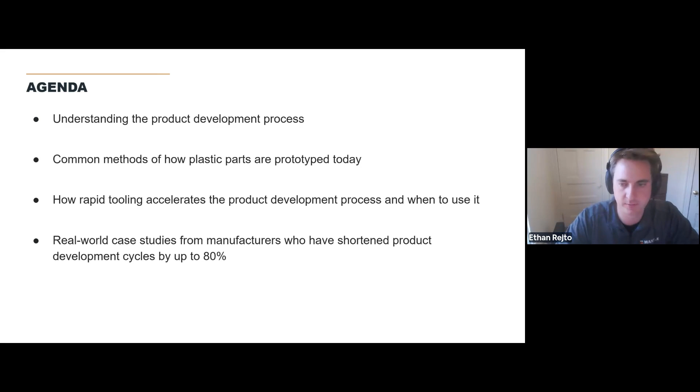Then I have a bunch of examples. I have some parts here on my desk that we'll talk about, of people who are actually doing this and how they're using rapid tooling to dramatically accelerate their product development. We'll look at a ton of examples of that. And without further ado, let's go ahead and get started, jumping right into it here.

When we look at the product development process, specifically for plastic parts, for medical components, aerospace, automotive components, for these highly regulated industries, and really in general, we see that it's incredibly fast in the early stages, in the early design stages. You're working in CAD, maybe in some simulation and some assemblies, understanding how your parts are going to fit together. You're going from a sketch to maybe a 3D rendering to understand what is this part going to do, is it going to function, etc.

Of course, early on, there's some great plastic 3D printing opportunities where we're printing form and fit prototypes, just something to understand does this design work, how does it feel in my hand, is it going to fit together, to understand how this design works and iterate on that very, very quickly.

What we see really, really slow down the product development process is when we move into actual design verification. Because unfortunately, a plastic prototype, a CAD model, is only going to get you so far. Eventually, you're going to need to move into an end-use material. For most plastics, that's an injection molded polymer that's going to perform very, very differently than a plastic 3D printed part. And you don't just need to now validate the design of the part itself, but now we need to start to de-risk the actual manufacturing process as well, the production process.

We have to understand, can my part be made in volume for an affordable price via molding, via other processes? And that's where we really see the product development process kind of grind to a halt. One of the big reasons for that is because generally you need tooling at this stage, and tooling is often known to be some of the most expensive and most time-consuming things to produce.

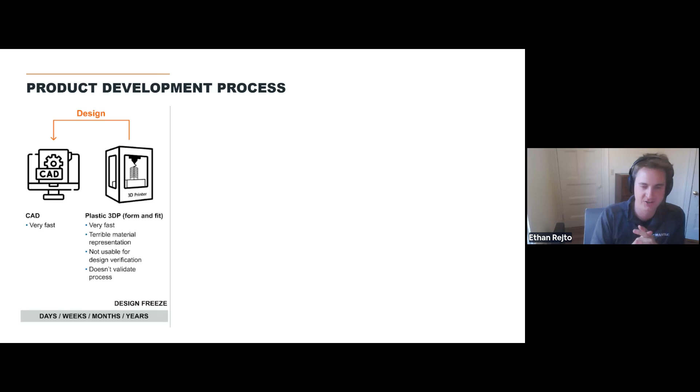But once you have a design you want to go forward with, now we need to validate the design itself in a production environment, which means I need to get a part in an end use material. There's a couple different ways we see our customers doing that.

The first would be machining. You can machine a plastic component, of course. You can machine something out of ABS or out of polymers, glass filled, nylon, or whatever your end use molded material is going to be. You can go ahead and machine a part out of that.

What's the advantage of that? It's very fast, right? You're not having to wait for that tool. So you're going to get an end use part in your plastic component without having to wait for a tool.

Unfortunately, it's not a perfect material representation because it wasn't produced with the production manufacturing process. We see this especially with things that are glass filled or filled resins, where you're actually cutting those fibers during the machining process, and that causes the part to perform quite differently than it would in a production environment.

Depending on the application, it's not always usable for design verification, and you're doing nothing here to validate the actual process. Another option is to use a prototype tool—we'll talk about prototype tooling in a second—something like an aluminum tool or even plastic 3D printed tools. While this is a little slower, it's a much better material representation than machining because you're actually flowing plastic, flowing resin, and understanding how that part's going to perform as an injection molded part. Often it's not usable for design verification or process verification because it's still very different than what's going to happen in production.

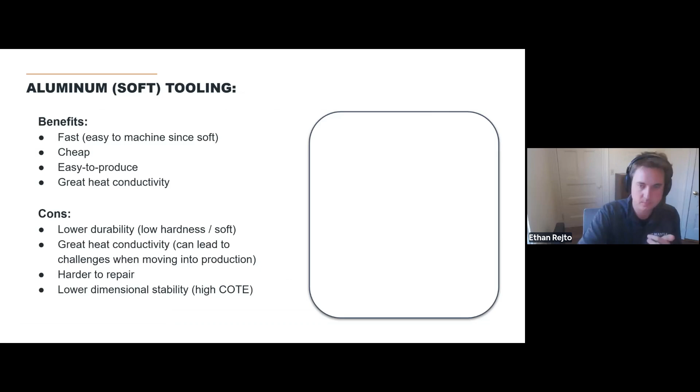Here we're seeing a perfect material representation. It's perfect for design verification, and you're also validating your process. But of course, it's super slow. If you know anything about production tooling and steel tooling, it's often some of the most time-consuming and expensive parts to make across any industry. So getting to this stage, you go from days to weeks to often months, if not longer. I just quickly want to share a little bit more about aluminum tooling and some education here.

Aluminum tooling, we get great feedback for the right applications. If you know anything about aluminum or soft tooling, it's often called, it's really fast compared to a tool steel tool. The reason for that is because it's very easy to machine since the hardness is low and it's a relatively soft material. Aluminum is relatively inexpensive, both the raw material as well as the process, because of that low hardness, which makes it easy to produce.

Another benefit here is it actually has quite great heat conductivity. So we see a lot of aluminum tooling in packaging and thermoforming applications where the volume is really high and it's not overly abrasive, because you can cycle it so quickly due to that awesome heat conductivity.

The cons here: lower durability thanks to that lower hardness and the fact that it's a soft material, so it's not going to last a long time. Sometimes that's totally fine if it's just a prototyping application, or maybe it's a few thousand parts, or it's not a very abrasive resin - that can be okay.

One of our benefits is also a con, which is that great heat conductivity. This can lead to a lot of challenges when moving into production. We hear from customers all the time that their part was working awesome in an aluminum tool, and then they move to a steel tool and it's warping, the tolerances are all off, because the shrink rates are totally different now - the steel conducts heat so much differently than the aluminum tool was.

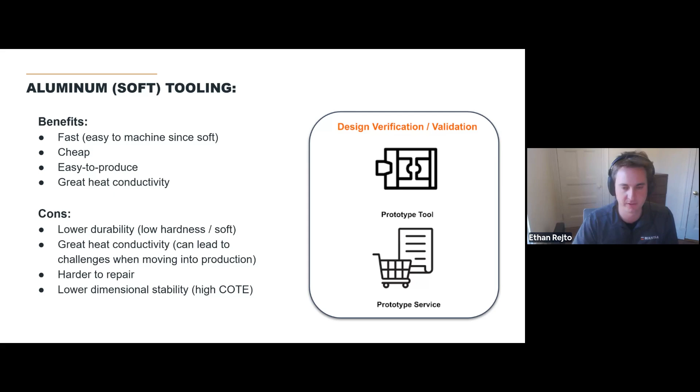Harder to repair, which may not be a big deal if you're just doing a prototyping application, and then lower dimensional stability because of those thermal properties again. It's got a higher coefficient of thermal expansion, which means the tool is going to move a little bit more on you during processing as well as during molding applications, which means it can be a little bit harder to hold really tight tolerances.

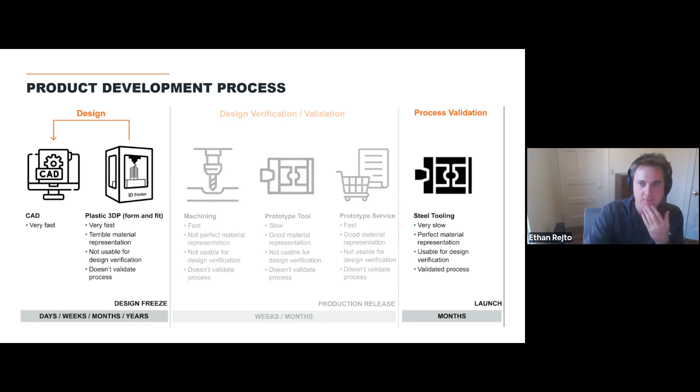Just wanted to share a little bit more detail about aluminum tools, because now we're going to start to talk about: what if we could remove aluminum tools from the equation? What if we could remove that machining step and go right to this idea of going straight from plastic 3D printing to a steel tool? Wouldn't that be awesome? Why don't we just do that?

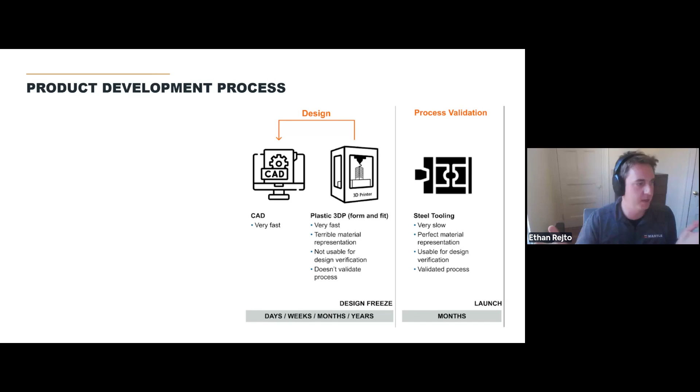Of course, it's because of the very, very high costs and the very, very long lead times associated with steel tooling. But wouldn't it be awesome if we could use a steel tool to get our end use plastic material as well as our end use manufacturing process, allowing us to get true production parts during prototyping?

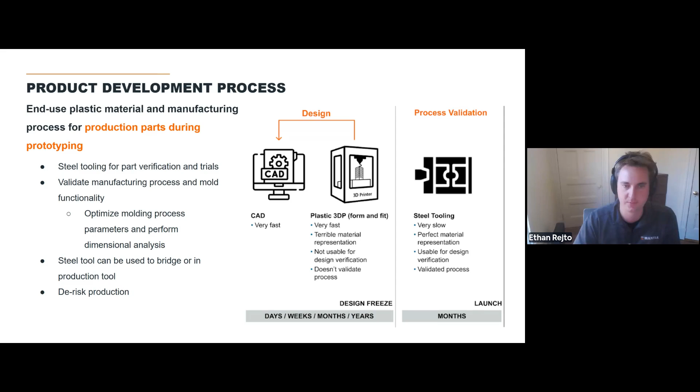That would enable steel tooling for part verification and trials. It allows us to validate that manufacturing process and mold functionality, which actually allows us to start to learn about our molding process as well - the pressures, the temperatures, all of that - to actually understand how our parts are going to perform in production. That steel tool could then be used to bridge into production and ultimately just de-risk production.

So if all of these things are so great, why wouldn't everyone just be using steel tooling early in development? Why would we bother with aluminum tooling and machining and all these other processes? I think you know that, and it's because there's a lot of challenges associated with steel tooling, as I've mentioned.

Really, really long lead times and high costs due to the extremely precise tolerances we often see, strict surface finish requirements, and these tools often have to be very, very smooth and have excellent surface finish requirements, which can be challenging, especially when working with a mold component.

Specific, hard to work with steels - these are very, very specific materials that have high hardness, which makes them very hard to work with. And that really limits new product development speed by using these steel tools.

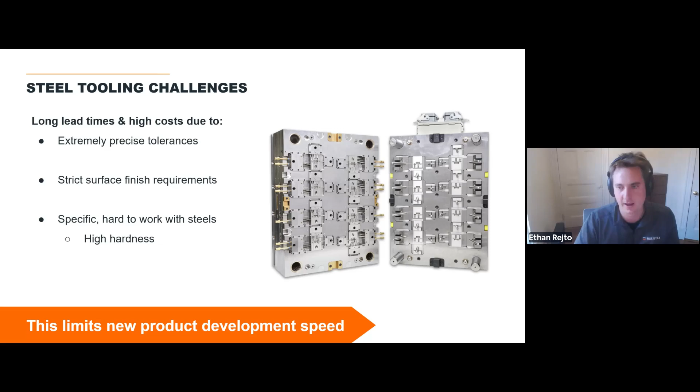That's where I'm going to introduce Mantle. For the right applications, we actually see our customers doing this, where they're moving right from a plastic 3D printed prototype straight into a Mantle tool, which is tool steel. So we're often seeing a lot of our customers saying they're getting production tools in prototype timing, where now we're using a tool steel tool to do that functional and process validation.

And you're really validating the entire manufacturing process right after you move on from a design freeze. It's fast - it's similar to prototype costing. You're getting that perfect material representation, meaning the material coming out of this tool is identical to what's going to be used in production, which is not the case for a machined component, a plastic 3D printing component, or an aluminum tool component, where it's going to be different than what happens in production.

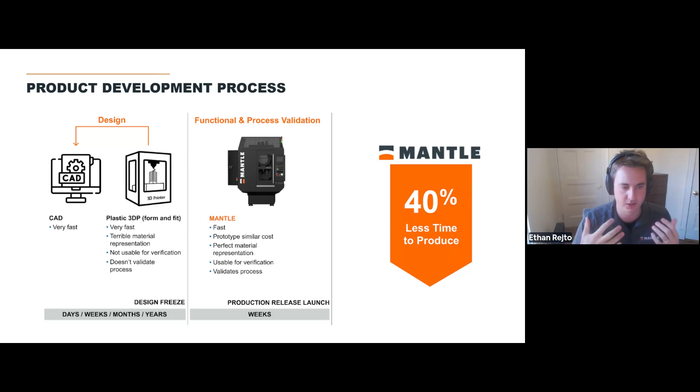It's going to be usable for verification and, of course, to validate processes. And, of course, all of this is happening in dramatically less time, which enables you to bring products to market faster.

We're going to move over now and talk about how this is being done. In the conventional toolmaking process, there's a lot of steps involved. Everything from quoting the tool to sourcing the raw materials, to doing the CAM programming for the rough milling step, the fixturing of the component. Often there's heat treatment involved to raise the hardness even higher after rough milling is done. Then there would be a hard milling step after heat treatment to hone in those tolerances even more. And if you're familiar with EDM, we're going to talk a lot about sinker EDM today, because molds often require a lot of sinker EDM steps, which are extremely time consuming and expensive.

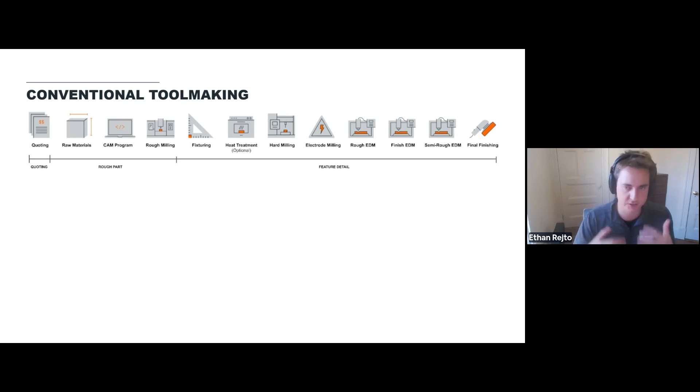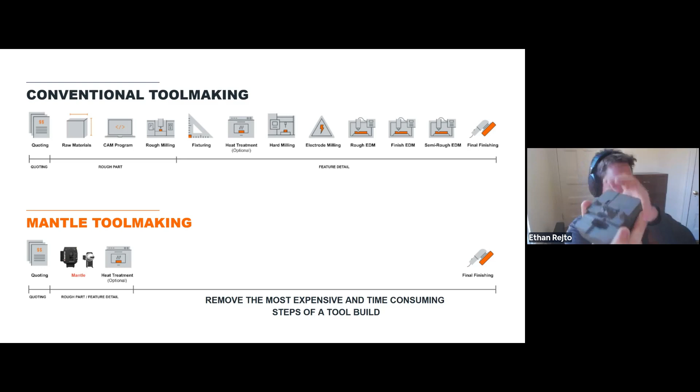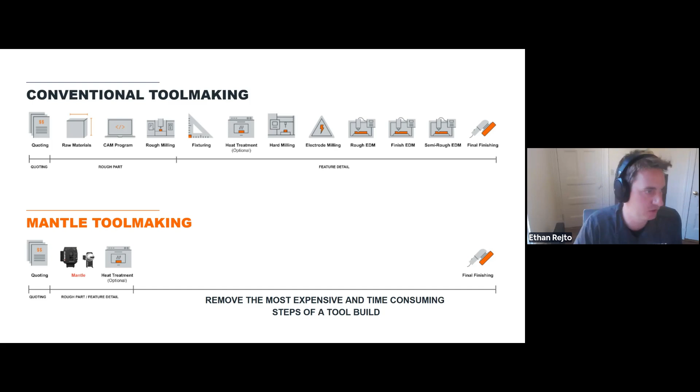So the way that Mantle accelerates this product development, reduces cost, reduces lead time, is that it cuts out almost all of the most expensive and time consuming steps of a tool build. We're going directly from the Mantle process to something like this. Our customers are often telling us that Mantle gets them 75 to 85% of the way there, and all that's required is a little bit of finishing. Generally, that means grinding to the exterior and finishing of ejector pins to hone in those last little bits, but we're removing all of that milling, all of that hard milling, all of that sinker EDM process to allow you to get something that's almost complete, just requires a little bit of finishing. So removing those really, really expensive and time-consuming steps of the tool build.

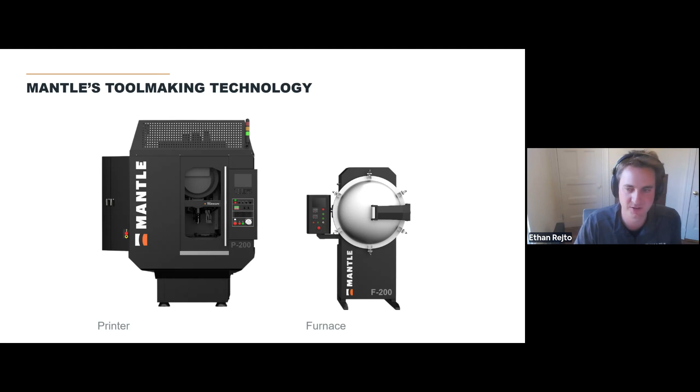Let's talk about how this actually works, because it's a little bit of a unique process and a little bit different than many other additive manufacturing processes. Mantle's tool-making technology combines two different pieces of equipment. There's a printer, which you're seeing on the left, and it's questionable whether we should call it a printer or not, because once you learn how it works, you'll see that this is a little bit unique. And then a furnace, which is on the right.

There's three main steps involved in the tool-making process. There's printing and shaping, and we'll look at how that actually works. And then there's the sintering step, which is where we're actually hardening the material. So first, the part goes through the printer, and then it goes into the furnace to be hardened.

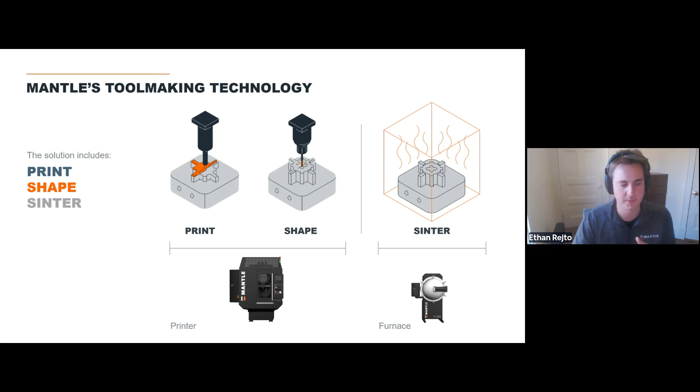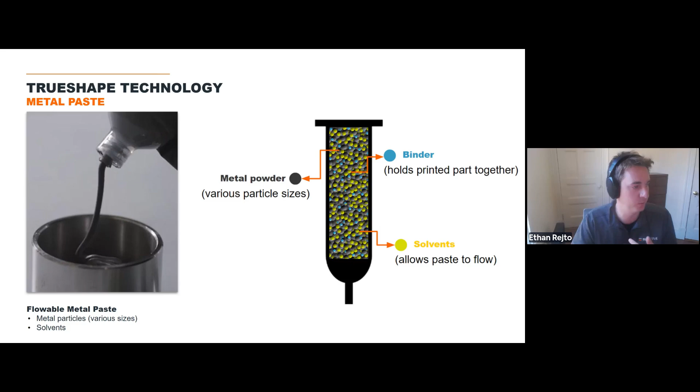One thing that's a little unique about Mantle, especially compared to other metal 3D printing technologies, is that we actually start by printing a metal paste. That paste is very similar to toothpaste. It's metal particles of various different particle sizes mixed with some solvent and some binder as well. That's what you're seeing here on the right. It's this kind of concoction of paste, which is a combination of metal powder, binder, and solvent. The reason we're using these three materials is that the solvent allows the paste to flow, which is going to be really important for when we're extruding. And the binder is actually just being used to hold the part together during the printing process.

So the first step of the printing process is simply to print. We're extruding this paste. It's viscous enough that it can simply just be pumped through this needle that you're seeing here. It's very flowable. Of course, there's no loose metal powder because all that metal powder is encapsulated in the solvent and the binder. So the first step of the printing process is exactly like you see here: we're simply printing and using that solvent to flow the material through the needle.

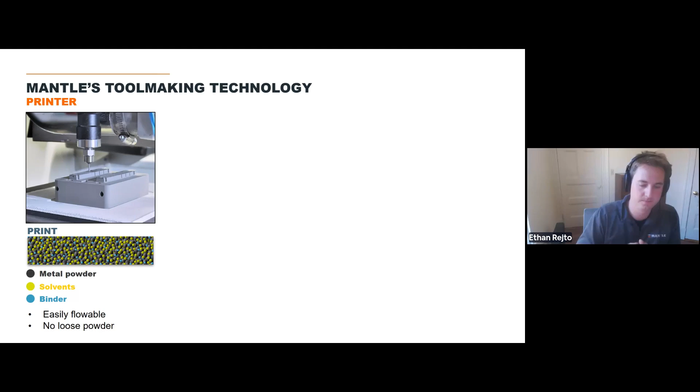After a layer is printed, it's then dried. This is just done with heat. Here we're actually removing the solvent out of the paste, out of the material. So we're drying up that layer. We're going from kind of a toothpaste to a foam-like material as we remove that solvent. We're raising the green body density and leaving behind just binder and metal powder.

The next step here is to actually machine, or to shape. This is a machining step that's happening every single layer, where we're now going through and refining with traditional machining operations - cutting the material, refining the shape, overprinting a little bit, and then trimming it back to really hone in the part. Which is why, if you've ever seen a Mantle part before, I don't know how well it'll come across on my camera here, but the surface finish is really just exceptional because we're getting that from the machining process.

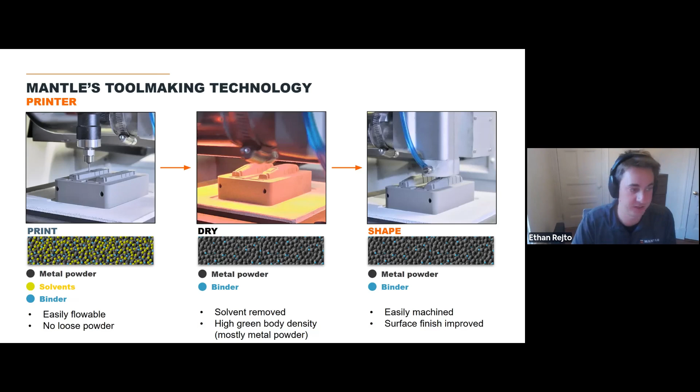The features are very sharp because we're getting that from the machining process, where we're putting this paste where it needs to go, and then coming back and refining that shape with traditional CNC cutting tools. This happens every single layer, which is why we can do these really deep ribs and things like that, because we print, dry, machine over and over again to build up a part.

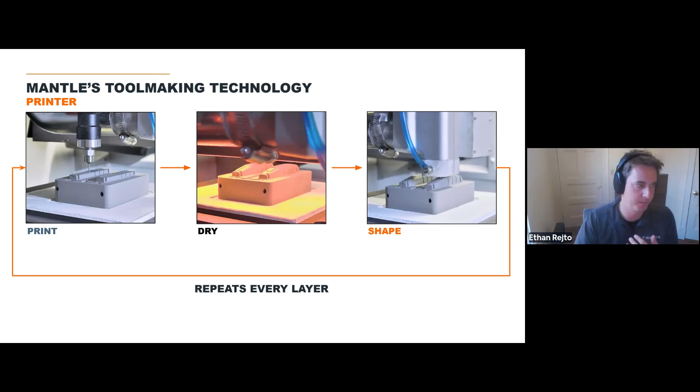After a part has been produced in the printer, it goes into a furnace. If you're familiar with metal injection molding or powdered metal processes, this is a sintering step. The part shrinks about 9% in the furnace, which is a lot less than most powdered metal processes, but it does shrink about 9%. That's the steel actually densifying and bonding together, where we're removing all the binder out of the part. There's no binder left in the part after this process. The result is a dense, strong metal part with isotropic material properties and no residual stresses, so it's very stable.

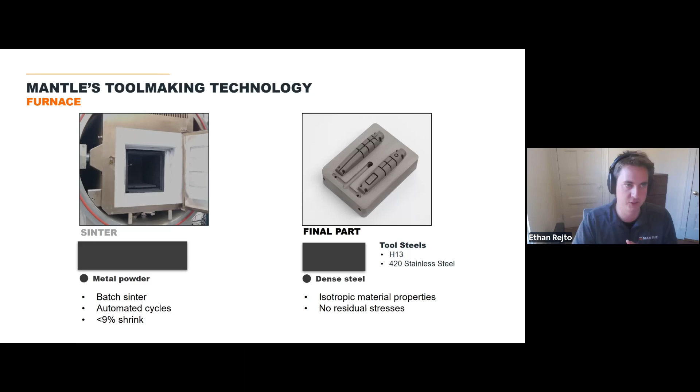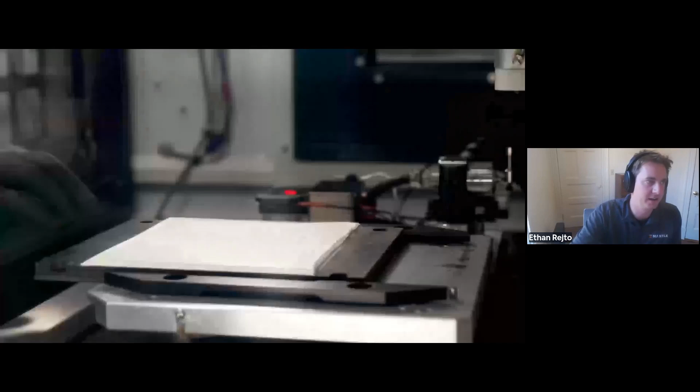I have a quick video here just because it's a little bit of a unique process. You can see starting with that metal paste, we're sliding in that build plate that we're going to print on top of, just extruding out that paste material where we're printing a layer of that paste.

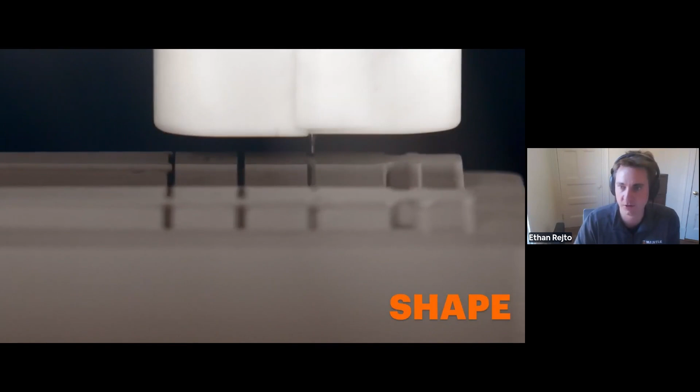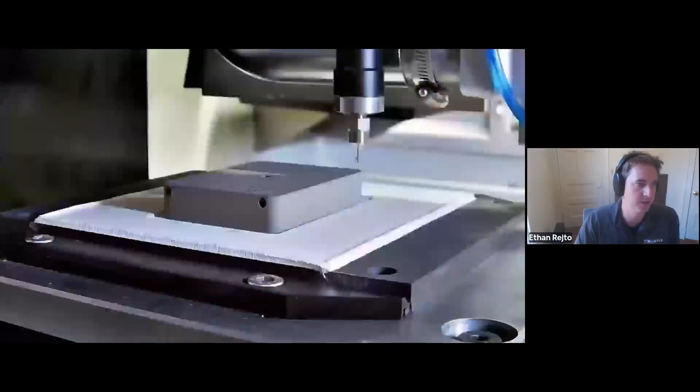You can see it being dried, that layer, and then it goes ahead and is machined. Again, this is happening every single layer: print, dry, machine, print, dry, machine. That happens every single layer to refine the shape. It also enables us to use really small cutting tools because the force on the tool is very low since it's a layer at a time, which allows us to do some, the smallest cutting tool we're using today is a 6 thou ball end mill.

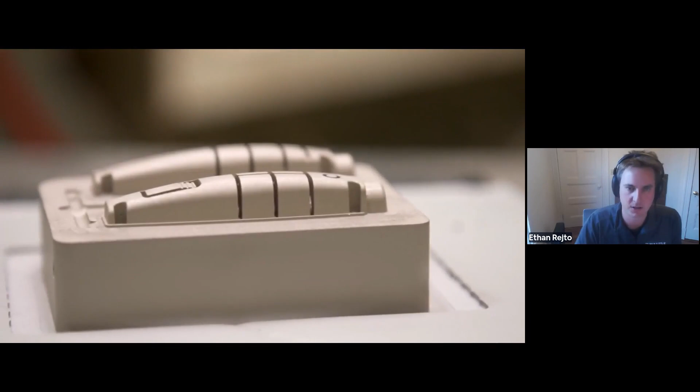You can see it's then placed inside of a furnace. That furnace is going to take anywhere from 24 to 42 hours, depending on the size of the part. And then what comes out is a dense, strong tool steel component. So hopefully that helps understand the process a little bit. It's a very unique process where we're printing, drying, and machining every single layer.

It's great to have a very fancy print process. There's a lot of people out there who have these fancy print processes, but what actually matters is that it's saving our customers time and money.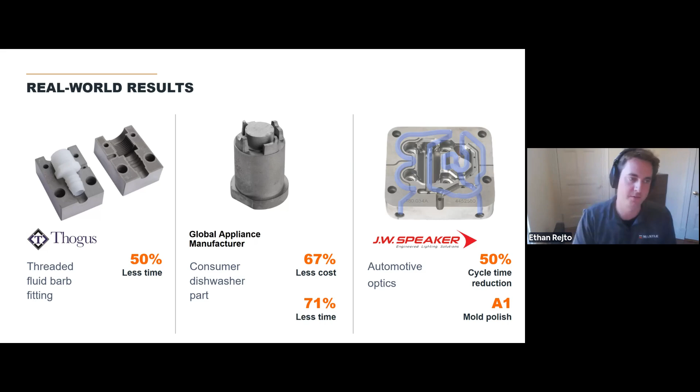And it's very common to talk about metal 3D printing and molding with conformal cooling. An example of an automotive optic component where there was a 50% cycle time reduction thanks to conformal cooling. And they were actually able to achieve an A1 polish, which if you know about optic molding, the finish of the mold is very important to get that very clear finish, which they were able to do off of the Mantle insert.

In terms of materials, very commonly asked, we print some industry standard tool steels, H13, which is commonly known as really the workhorse of injection mold steels. Comes out of the furnace at about 42 Rockwell as sintered, and if you wanted to afterwards, you could go ahead and heat treat that up to over 50.

A more newer material for us is 420 stainless steel. This was a result of feedback from mostly our medical device customers who really wanted a corrosion resistant tooling material. It's ideal for those applications, and another great, very common tool steel.

One of the most common questions we get is asking about the durability of the material. Earlier we were talking a lot about prototyping, about product development, and they ask, is this material durable? Is it just for prototyping? Is it just for 1,000 shots or 5,000 shots?

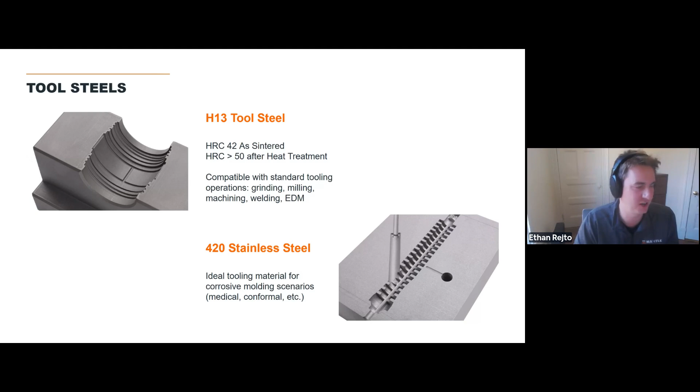Just quickly, this is not necessarily an example that's overly related to product development, but just to show the durability of the material: an example with Tessy Plastics here, where they've molded over 3.4 million cycles and counting, and have seen no unexpected signs of wear on the printed tool. I actually have this tool with me here today, and this is a good example.

Actually, this is a 32 cavity tool that they're running. These are sticks for your deodorant, the screws that advance your deodorant up through the tube. They have a 32 cavity tool running these. They've replaced 2 of them with Mantle printed inserts, and these have been running for, I think, over 3.5 years now.

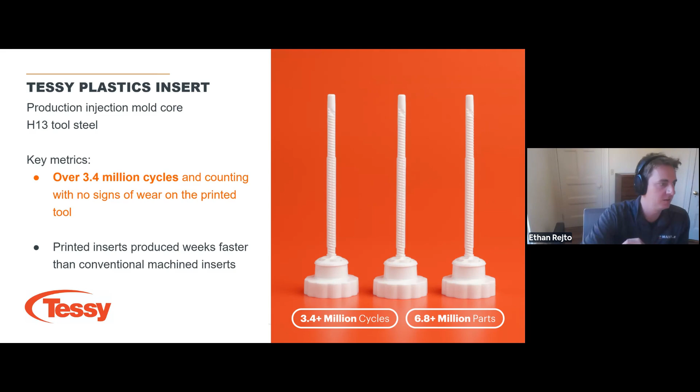Just one more quick bit about the process before we start diving into application examples. People are always asking is it compatible with standard operating procedures? Can I mill it, grind it, machine it, wire it, polish it, texture it, weld it? All of that's possible because certainly there are applications where you're going to need beyond the tolerances or surface finish that are possible with our technology.

And all of that can be done, often still removing much of the time and cost of the process, because we're getting you 75% of the way there.

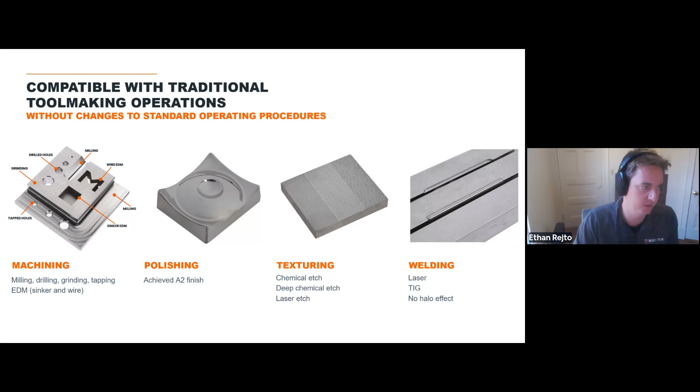Awesome. At this point, going to jump into a bunch of examples of how companies are actually using this technology specifically for product development and accelerating product development. We're going to look at Hypertherm, Heiko, a medical device OEM who unfortunately I can't name, but have done some great work with Mantle, Westminster Tool, and Nicolet Plastics, which are a little bit unique in that one's a tool maker and one's a molder. But we'll look at some OEMs first to understand how they're using this.

Starting with Hypertherm. Hypertherm is a leader in plasma cutting and plasma torch components. This here is a component used as a shield cap for a cutting torch, which I think actually holds the consumable in the torch. They had a new design coming out where they needed to very quickly validate this design, because as you can imagine a plasma torch gets very, very hot. So there were some pretty unique material requirements for this cap.

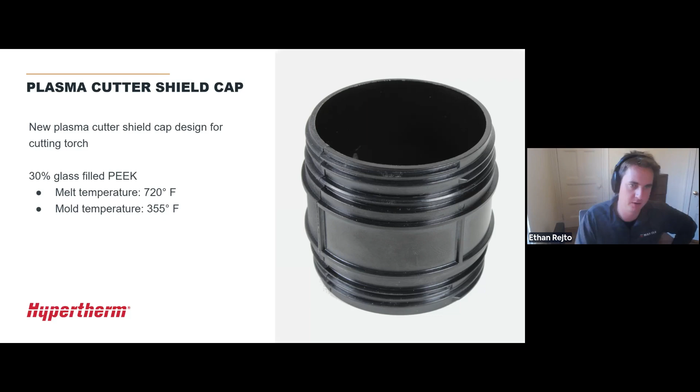This was being molded in a 30% glass-filled PEEK. So the melt temperature on that was 720 degrees Fahrenheit, and they were actually heating the tool to 355 degrees Fahrenheit to improve the moldability of this PEEK material. So a very abrasive, very high temperature material.

This is actually a slide component that's used to form the outside of that cap. They printed it in H13 tool steel, about a 129-hour print, so about a week of printing. Of course, that's a little less than a week. And that's fully unattended, so all that time is just the printer working on its own.

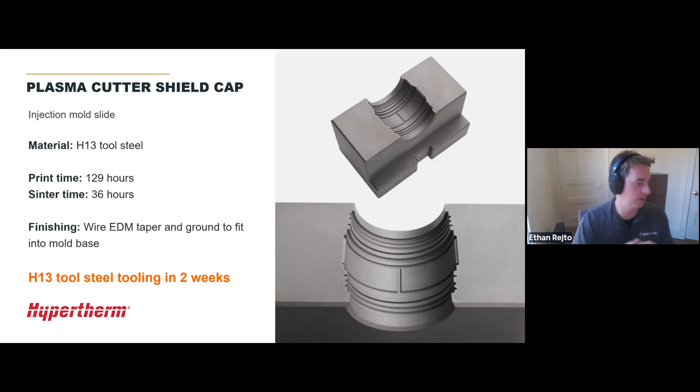They did have to do a little bit of finishing here. They wire EDM'd to taper, and they just ground the outside of it to fit into the mold base. All in all, it took them just 2 weeks to go from the tool design to actually running this in the press. You can see the part actually installed in the press here around the core component where it's forming the outside of that tool.

They were able to do this with a 75% lead time reduction, 75% cost reduction. The reason for that was because they used all of the printed detail with no processing to that part detail. So where the mold is actually touching plastic, all of that was left as printed. And they were running that 30% glass-filled PEEK, a high temperature, high abrasive engineering resin with no real challenges here.

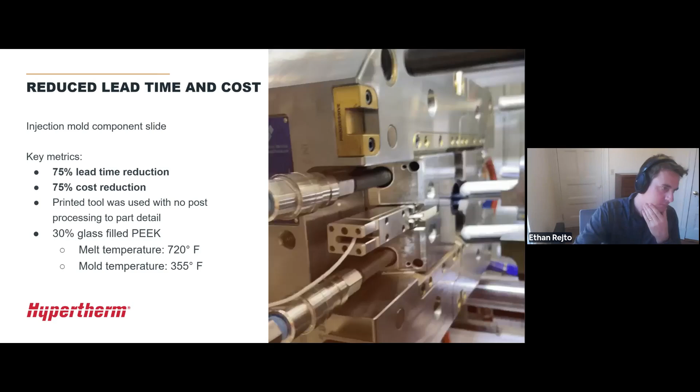You can see it actually being run here. You can watch videos like this all day, but you can see no challenges here. And they produced a couple thousand of these parts, I believe, with no challenges.

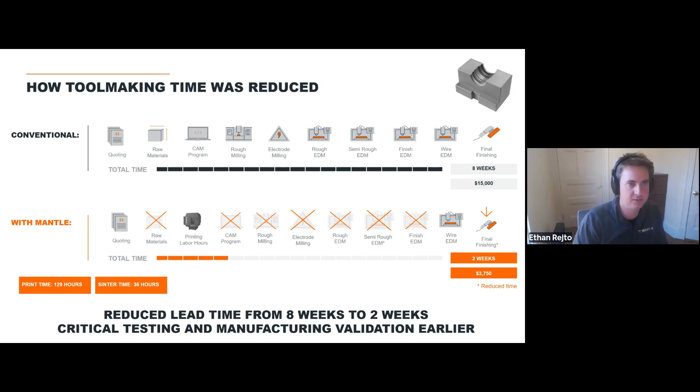So all in all, what did that mean? It meant they reduced the lead time on this from 8 weeks down to 2 weeks. And you can imagine how significant that 6 weeks, a month and a half of time savings is when they're trying to validate this design to move to production to get this part and get this design on the shelves, on the market, and being sold.

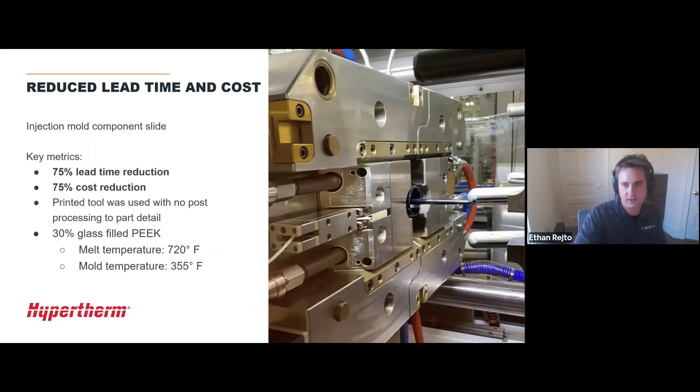The reason that they were able to save so much time and cost here was because, like we mentioned, they cut out all of the EDM time that would have been involved. If you look at the ribs on this component, all of these ribs would have required electrode burning, which is very expensive and very time consuming. They were able to remove all of that out. They still did a little bit of wire EDM just for the taper on the slide, and then the grinding components, but still from 8 weeks down to just 2 weeks, thanks to their use of Mantle.

So that allowed them to do that critical testing and manufacturing validation much earlier in the process because they weren't waiting on tools to come in.

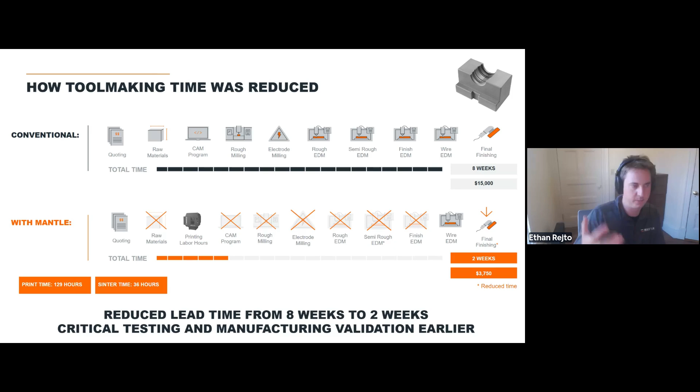The next is Heyco Products, a component manufacturer located down in New Jersey. They make a lot of wiring components, harness components, clips, and different electrical components. You'll see some examples here. Just a quick quote from their VP of Operations before we start looking at some of their examples. Using their Mantle technology, they've already brought a new product to market 2 months faster than they would have otherwise. So really good results from Heyco here.

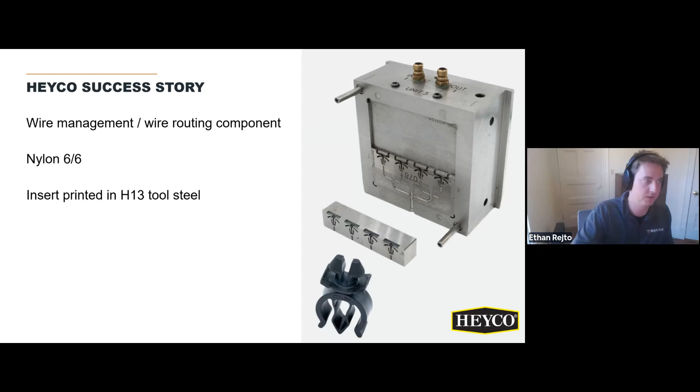To conventionally produce these inserts, they would have had to rough mill it first, design, program, and machine electrodes—EDMs are a pretty common theme for us today. They would have squared the blocks afterwards, drilled and tapped the holes, done the actual burning process for that feature detail, wired the ejector pin components, and then burned in the gates.

Using their Mantle machine, they removed all of that EDM work. They still had to do the printing and sintering, square up the inserts, and tap the holes on the back to hold it inside that mold frame. They wired the ejector pins and burned the gates. But the real benefit here came from the ability to leave the cavity detail as printed, so they didn't have to touch any of that feature detail where the plastic actually touches the steel.

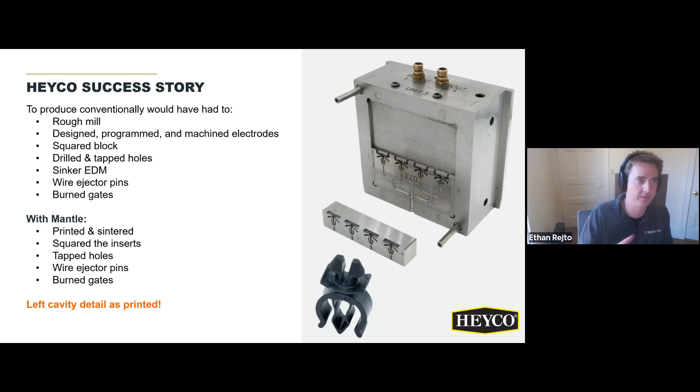Key results here: it passed all the form and function they were anticipating, which allowed them to produce these parts and start selling them. They've run this over 750,000 cycles, over 3 million parts, with no issues. They saved 2 weeks on this tool—2 weeks faster in getting this product to market—and 60% of the cost compared to producing this tool traditionally. So they saved a lot of cost as well as time here.

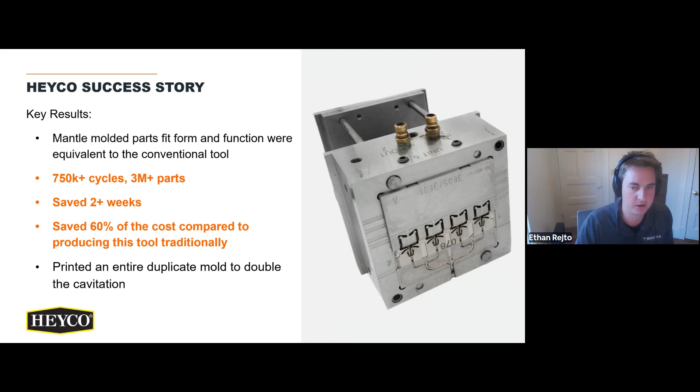They actually had such great success here that they printed an entire duplicate mold to double the cavitation because there was so much demand for this product. Huge benefits there in being able to meet that demand faster because they're able to produce that tooling so quickly.

Another good example: this is a new product design they're bringing to market for a threaded component. I'll show it on the next slide. They found out they were going to need to make a change to the external threading, so they needed to mold some new parts because they weren't going to be able to validate that threading with a plastic component before moving into production. So they very quickly needed to produce an insert to understand how the threading was going to perform.

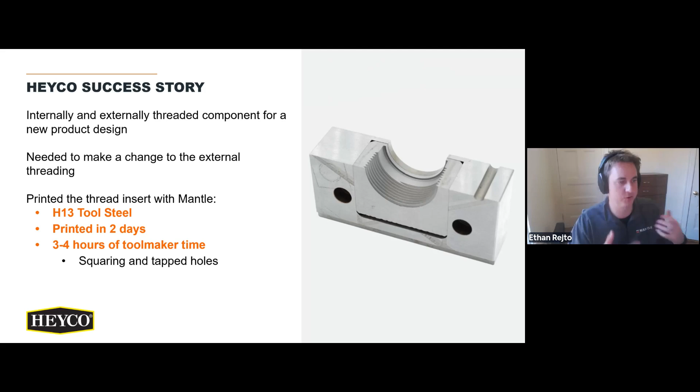They did this in H13 tool steel. They printed the insert in 2 days and only required 3 to 4 hours of their toolmaker's time, which is another common theme—how valuable toolmakers' time is and how hard it is to find toolmakers. So not having to tie up their toolmakers, who were busy working on other things, only required 3 or 4 hours for them to square and tap the holes here.

You can see there's the actual plastic component. The threads were very crisp. They blasted them afterwards, but didn't do any other finishing to the mold detail—no EDM or anything like that to get those threads to work. They were fully functional NPT threads, gauged and sealed properly, and they saved over 2 weeks by doing this. So just a good example of a prototype tool where they needed to validate something very quickly.

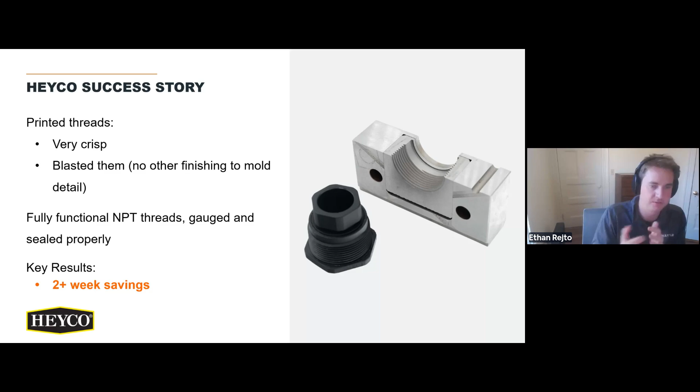We were able to do that by using some steel tools here. A little bit of a unique example that's not as related to injection molding or plastic parts, but I thought it was worth including: this is a copper crimp component used for crushing—a copper termination tool. This was again needed for new product development.

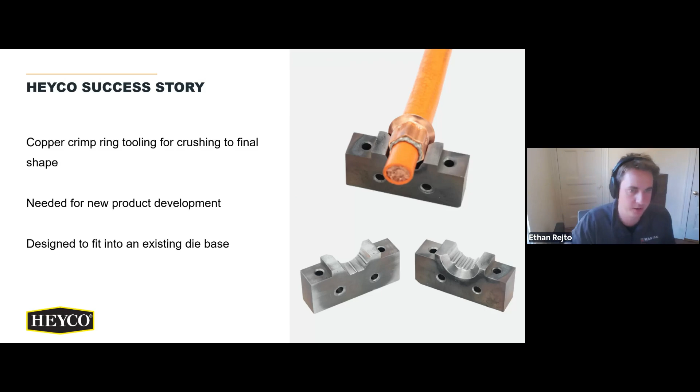They designed it to fit into an existing die base so they could test this very quickly. And what was so cool here was that it didn't actually tie up any of the resources from the tool room to produce this.

It kind of allowed the engineering team and the product development team to be their own tool maker. They didn't have to wait for anything. They were able to just throw it on the printer, use them as printed, and help them dramatically reduce the time to get this to market because they understood how it was going to crimp, how these tools were going to work much earlier on without having to go to the tool room, wait, and tie up their tool room time.

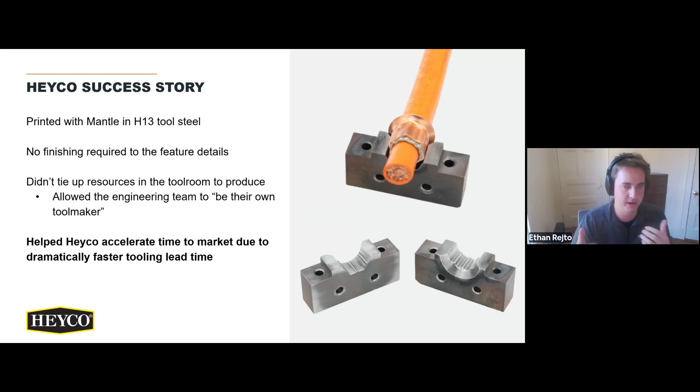One last example here from Heyco before we move on to talking about some other medical examples. This is a consumer product that they were prototyping for a customer. As you can see on this tool here, it would have required really extensive sinker EDM, multiple electrodes to produce these very deep, thin ribs that you're seeing on the tool. It also had a parting line at 15 degrees, which makes it additionally challenging to produce.

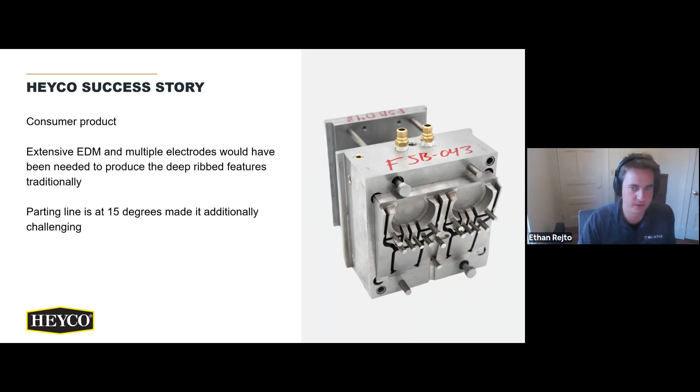They printed these inserts with Mantle. You can see the actual part there on the right, all of those ribs that were able to be molded off the printed tool. And they estimated they saved 40 to 60 hours of sinker EDM time by doing this, and required very minimal finishing after printing. They just squared the inserts and then tapped them.

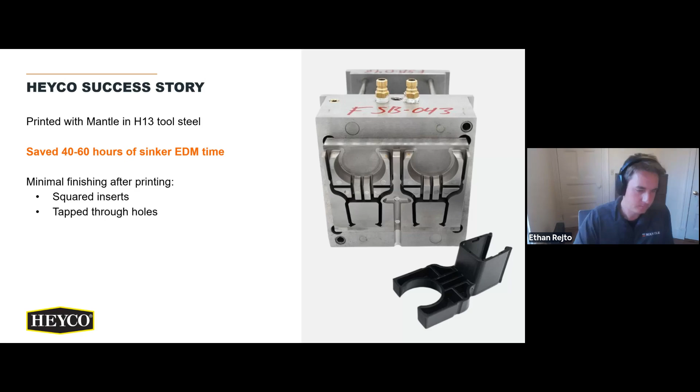Moving over to some medical device applications. This comes from one of our customers, a leading medical device OEM who has a few of our machines. This is a prototyping tool for a medical component they were bringing to market. Here, they were looking to test both acetal and radel in the prototyping stage to understand which material was going to work. Both are pretty abrasive engineering resins, so are difficult to work with.

Radel molds at 38,000 psi and has a high melt temperature. Acetal actually emits a corrosive gas during molding. So both of these mean that it's very difficult to use an aluminum tool or use a plastic 3D printed tool during that. They also, of course, needed to use production materials here, acetal and radel, because they were doing not just prototyping, but also some trials and FDA work to understand how these parts were going to perform.

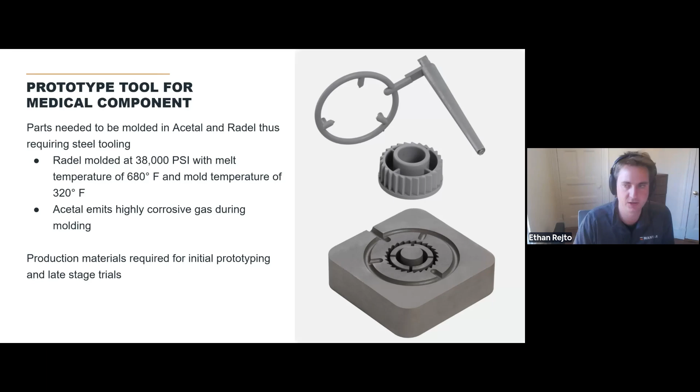Example here, printed these in 62 hours, about a day and a half in the furnace, finishing about 24 hours on these inserts. That was adding the ejector pins, tapping the mounting holes, and just grinding it to fit into the mold base. So pretty consistent finishing required for these inserts, but ultimately it was mold inserts in just 8 calendar days.

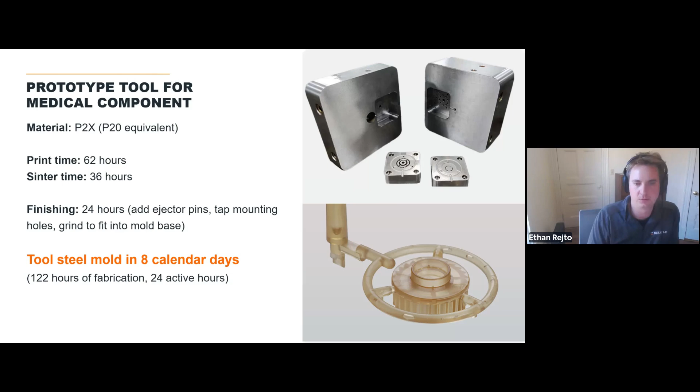They estimate 122 hours of fabrication, but only 24 hours of active hours, which is obviously very important to save their toolmaker time here. So tool steel molds in just 8 calendar days here. That was a reduction from the estimated 7 weeks they would have had to go out of house here because of how much sinker EDM it would have been required to build those thin ribs on this component.

And the amount of active hours required went down from 148 hours down to 24. They also saw a 50% cost reduction.

We haven't talked too much about tolerances today, but the entire tool was accurate within 1 thou as printed, which meant they didn't have to do any additional finishing, and all the molding surfaces were left as printed as a D2 finish, which is like similar to a sinker EDM matte finish, which was totally fine for this application. So all the molded parts passed all visual and dimensional requirements.

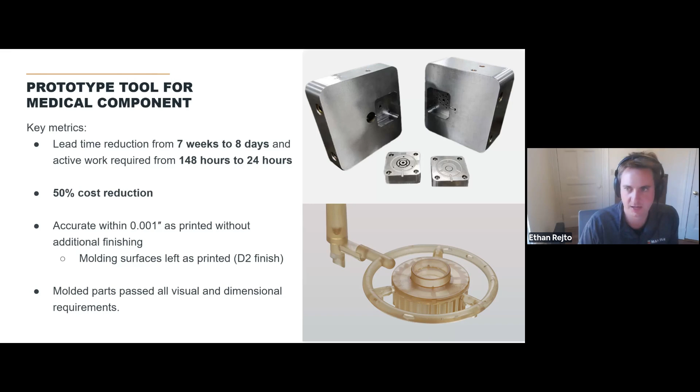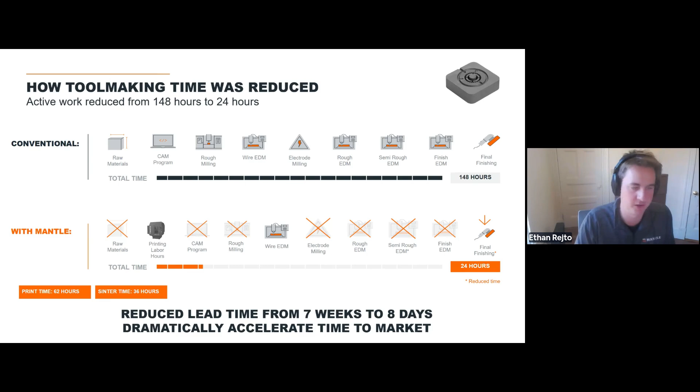So, good example here of really, really dramatic reduction in lead time on a medical prototype tool, dramatic cost reduction, thanks to being able to leave all that feature detail as printed, not have to go through that sinker EDM process. A quick look at how the actual steps go, again, very common themes here, but removing most of those very expensive and time consuming processes from the tool building process, specifically all of that sinker EDM time to reduce the lead time from 7 weeks down to just 8 days.

Looking a little bit differently here at one of our customers who is a tool maker, Westminster Tool, but they work with a lot of medical companies, medical OEMs. They have one of our machines here, and they recently used the technology specifically for helping a large medical OEM bring a new medical device product to market.

The customer here needed to produce what they call production representative parts as soon as possible. So the parts needed to be equivalent to what was going to be produced in production, which meant they needed to be molded, and they needed to be molded out of tool steel. They were doing this to both validate the part function.

They wanted to understand the molding process parameters to save them on the back end. Here they were doing some material selection through biocompatibility testing as well, testing a couple of different materials to understand how they would perform.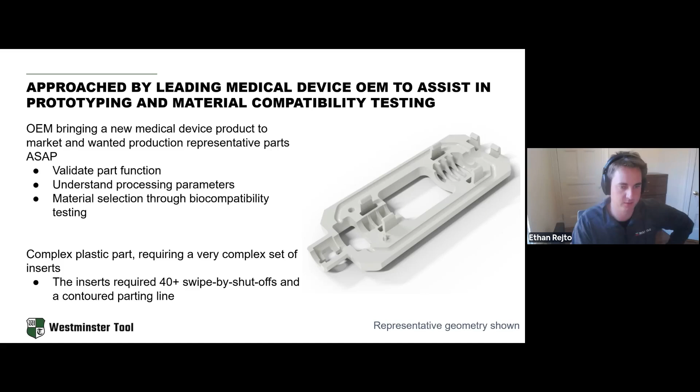The steps involved to produce this with Mantle: there were 6 days of printing to produce both of the inserts, which we'll look at next. All that printing was done unattended, so less than 2 hours of active time from the Westminster Tool team. They sintered the inserts, again unattended, but about a day and three quarters in the furnace. Then about 2.5 weeks of finishing, or 55 hours, which accounted for squaring of the blocks, hard milling the primary vents for gassing, and wire EDM of the ejector pinholes.

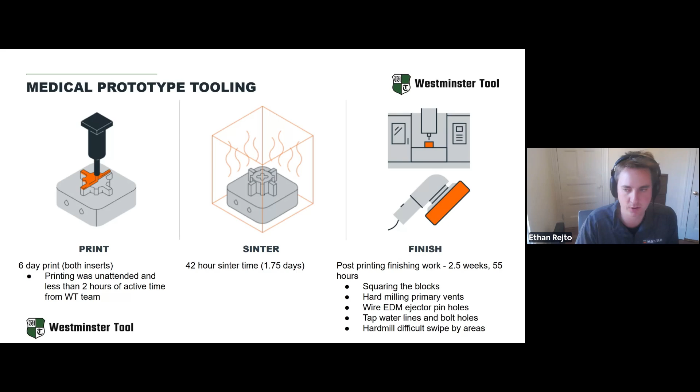They tapped the water lines and bolt holes, and they hard milled just a few of the difficult swipe by shutoff areas.

The result: they were able to mold production representative plastic parts in just 4 weeks. This was a reduction in lead time of 50%, from 8 weeks down to just 4 weeks, which enabled their medical device OEM to test and validate this part much faster than they would have traditionally. They also saved 65% of the traditional manufacturing time, which allowed their tool makers to work on other things while the Mantle machine was taking a lot of the work off their plate.

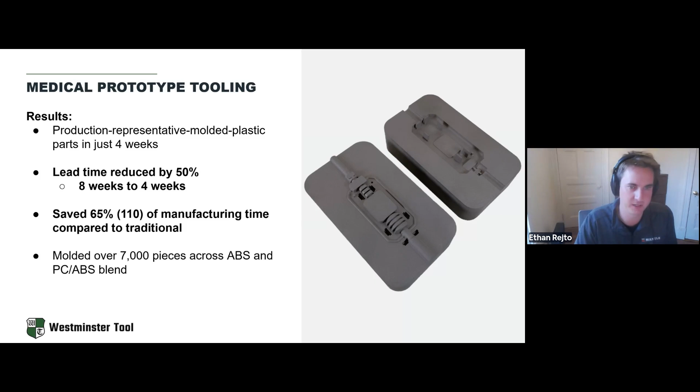They molded over 7,000 different pieces across both ABS and a polycarbonate ABS blend to understand which material they wanted to proceed forward to in production. So a good example here of a medical prototype tool used in tool steel reducing the lead time by 50%, from 8 weeks down to just 4 weeks to actually try injection molded prototype tools.

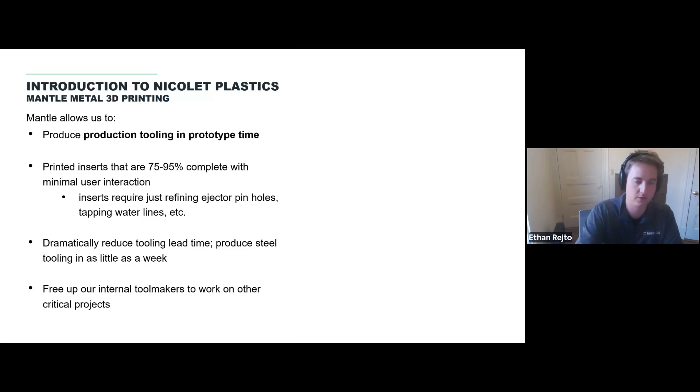Lastly, we're going to look at some examples from Nicolet Plastics. They're an injection molder, so a little different here, but they're using the technology to enable their customers to rapidly prototype plastic parts to get to market faster. Nicolet Plastics often says the Mantle machine allows them to produce production tooling on prototype timing, enabling them to use production quality tools during the prototyping stage.

The printed inserts are anywhere from 75 to 95% complete. This is one of their slides I'm using here. Inserts generally just require refining of ejector pinholes and tapping of water lines, very similar to what we've looked at before. This allows them to dramatically reduce tooling lead times.

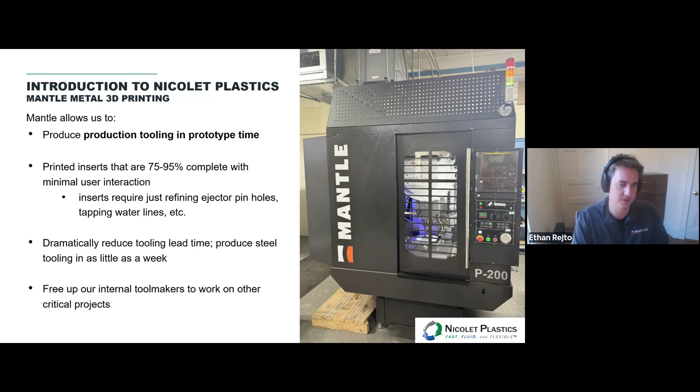They can produce steel tooling in as little as a week, which is a huge opportunity for their customers, as well as for people looking to prototype. It also frees up their internal tool makers to work on other critical projects.

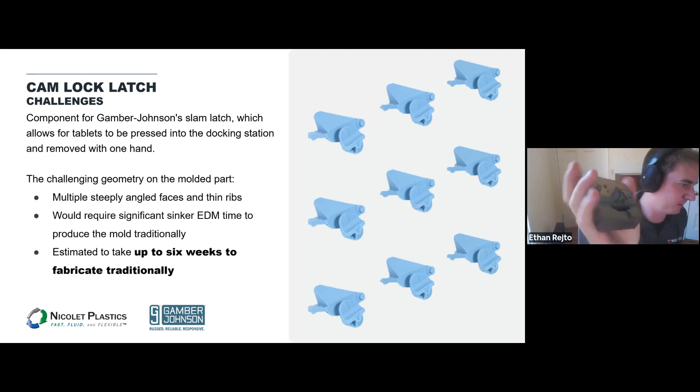The example I have here for us to talk about is this component - I actually have this one on my desk, it's my favorite tool, so I'm always using this example. This is a component for their customer, Gamber Johnson.

What this component actually does is it's a slam latch, used for holding tablets or computers to the dashboard of emergency vehicles, an ambulance, a police car. When you see a police officer going down the highway at 80 miles an hour typing on their computer, they're using this component to help hold that laptop on the dashboard.

One thing that's really important here for Gamber Johnson is that being first to market is incredibly important in the accessory industry - this is true for phone cases, tablet holders, etc. The first person to market often captures the majority of the market share. So bringing this product to market quickly was incredibly important to them. They wanted to be the first to offer this when a new tablet, laptop, or phone design comes out. So they went to Nicolet Plastics knowing they had this technology to hopefully produce tooling much faster than they would have traditionally.

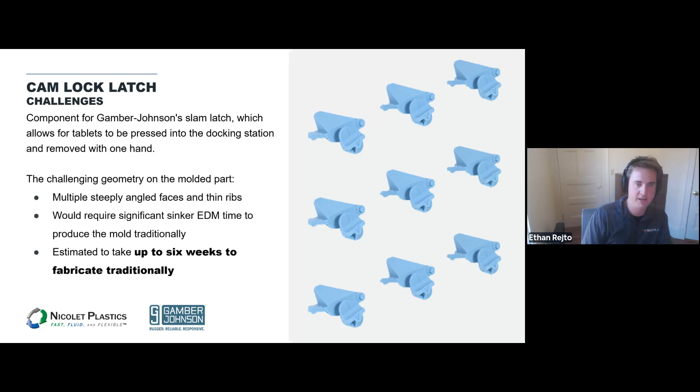The part's quite complex here - it has some very steeply angled faces, some thin ribs. Again, this common theme would have required quite significant sinker EDM time to produce these molds traditionally. They estimated it was going to take them up to 6 weeks to fabricate these traditionally.

They used Mantle to print these in H13 tool steel, printed in about a week, went in the furnace for about a day and a half. Total, that was just 10 hours of finishing afterwards, which again is a common theme here.

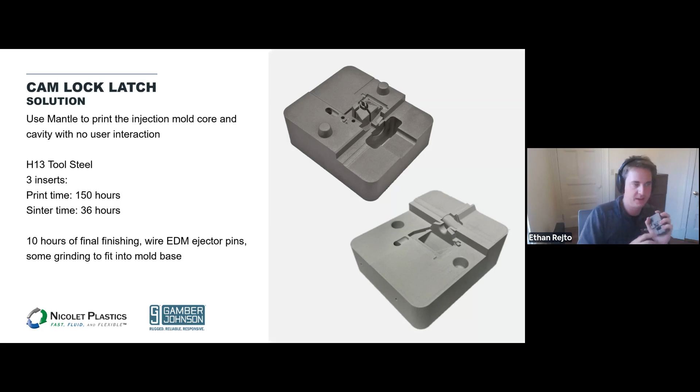They wire EDM'd the ejector pins. They did just a little bit of grinding to ensure the inserts fit well into the mold base and there wasn't any unnecessary flash or misalignment. You can see that the tool is actually in the mold here.

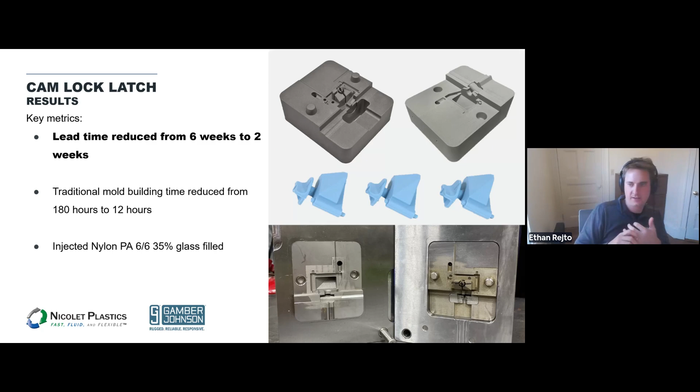Ultimately that enabled a lead time reduction from 6 weeks down to just 2 weeks. They estimated the amount of active time for their tool makers to produce this down from 180 hours down to just 12 hours. This was molding a 35% glass filled nylon, a pretty abrasive material, so they really benefited from the tool steel here with that high toughness.

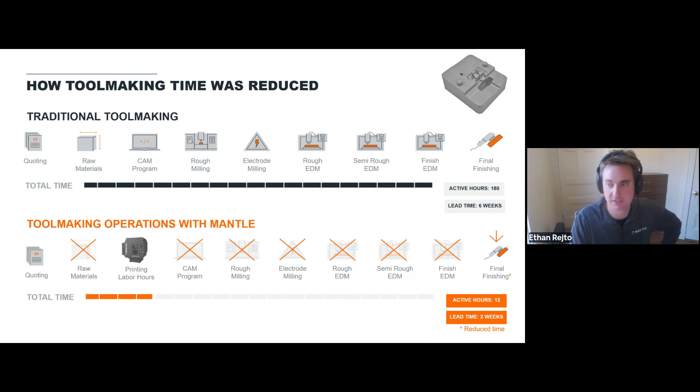Looking at the steps again, this really removed most of the very costly and time-consuming steps of the process. All that EDM was taken out, allowing them to get from 180 hours down to 12, and lead time from 6 weeks down to just 2 weeks.

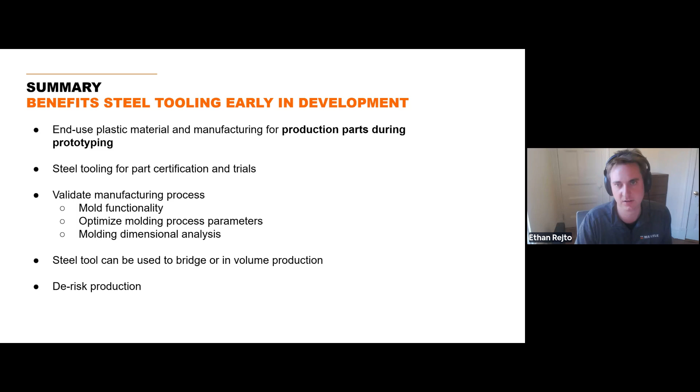We really see our customers benefit from using steel tooling early in the development phase. This now enables you to get these end-use plastic materials and manufacturing processes for production parts during the prototyping step, enabling part certification and trials. You're not just validating the part design, but now actually validating the production manufacturing method, the mold functionality, the molding parameters, the molding dimensions, etc.

Of course, we see customers that use steel tools for prototyping and then ultimately just run them in production as well, because it is steel, like we looked at, so it can be used for millions of cycles. It ultimately allows you to de-risk production and bring products to market faster, more affordably, and with less risk.